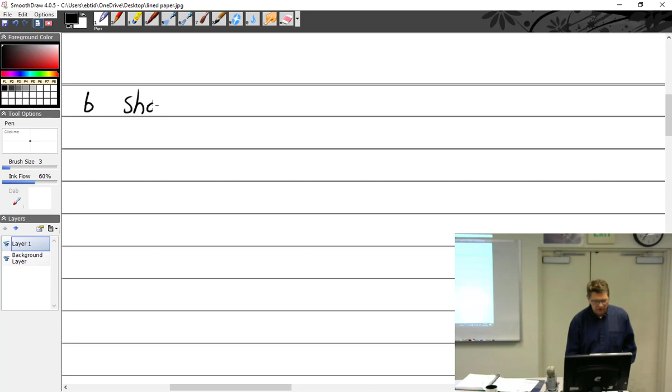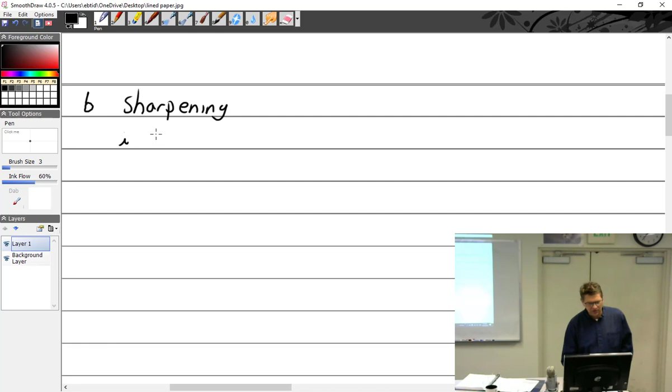So where we left off was B, sharpening. Put that in parentheses. Why should it be in parentheses? Sharpening. All right, and then we watched the videos. And according to the videos, we have things you can modify and control when sharpening.

What are the things that you control, or what you want to control? Give me some ideas. Angle. Yes, angle. Very good. There's only about 8 of them. Which angle? All of them.

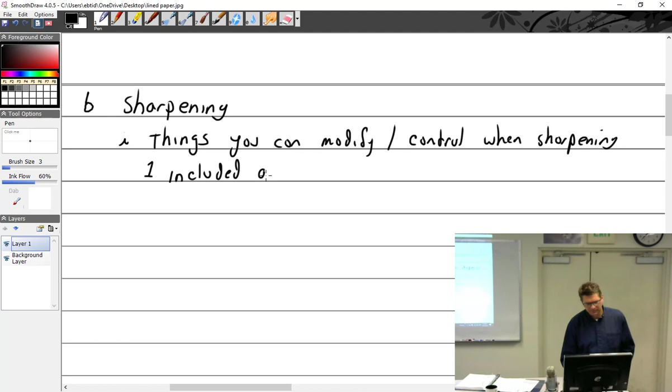Chisel edge angle. Lip angle. Drill point angle. Relief angle? How about the included angle? Oh, let's go with that. Field angle. What's the included angle?

What's the included angle? What is the included angle? It's an angle you include in the drill bit. It's this angle, which should be what for general purpose drill bits? 118, 118. You can control that by where the wheel is, how you address it to the wheel, right?

Is there a time when I'd want it to be something other than 118? Yes, when you're doing hard steel, you want it to be 146. Okay, good. You want it flattened out if you're doing hard steel. What if I'm doing some plastic? 40 degrees. How much? 90. Or pointing. Okay, so we can do that.

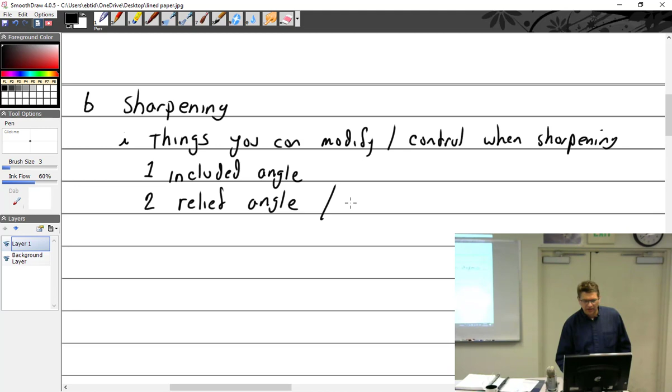And I'm going to have just one other one. What is the other angle that is probably even more critical? Very good, relief. Relief angle, also called lip clearance. So either which way, I've heard it both ways.

Drill bit speed and pressure.

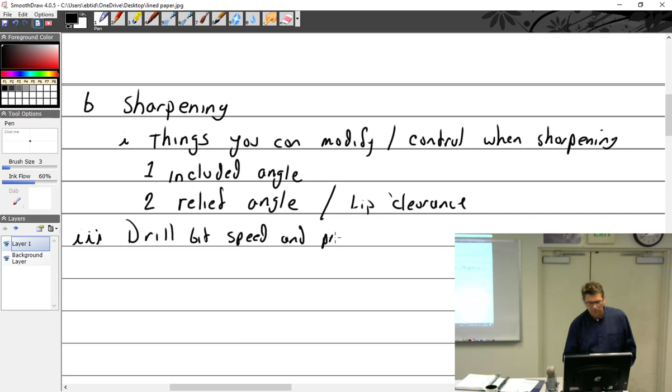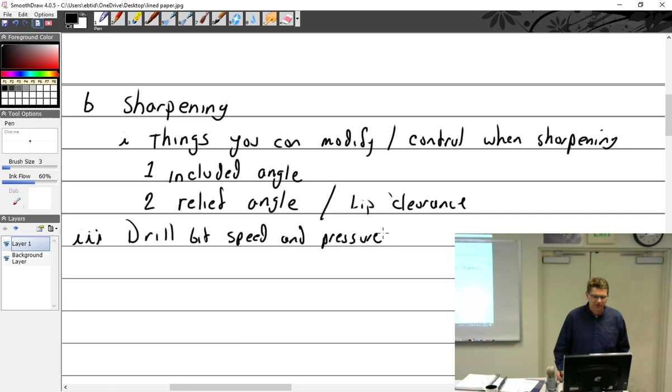All right, so we all agreed that it probably is cheaper under most circumstances to simply buy a new drill bit. However, if you do learn to sharpen them, there's been many times I've had a drill bit that just gets a little bit dull or a little bit of damage, and it's actually quite simple and fast if you know how to sharpen it, just walk up and give it a couple little swipes and you're good to go. It's not always economical to run to the store to grab a new drill bit, so it can save you some money. But it only makes sense if you have one like that size right there.

Yes, because those are probably $100 apiece, expensive. But if you have number 40s, you should already have a whole handful of them. So while that can be something we could argue about, one thing you can't argue about is drill bit speed and pressure is something you need to know.

All right, so for soft metals, or soft materials, we'll go soft metals slash materials. So what's a soft metal? That's kind of a little bit harder. Copper, brass.

You guys are drilling aluminum. What kind of drill bits do you have? Something flew in front of me. I saw it. Okay, good. I'm glad somebody else saw it. All right, general purpose for your aluminum.

All right, so soft, we're going brass, something like that, bronze. For soft, let me see, where are we at? The included angle should be, let's say about, because it can vary, about how much? Okay, 90 degrees. That's 45 each side.

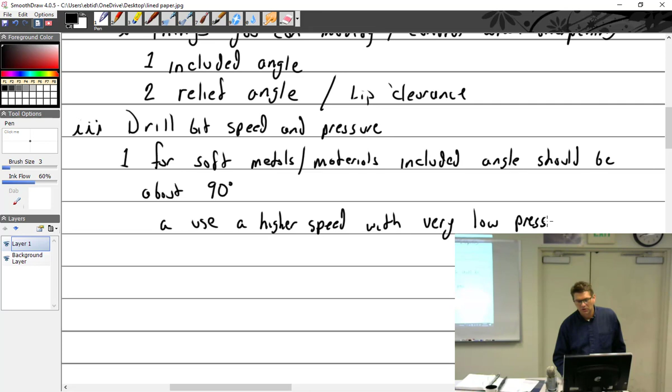Use a higher speed with, want to think high or low pressure? Low pressure. I'm gonna add that, very low pressure. If you're drilling plexiglass, which is something you do a lot as a mechanic, you put almost no pressure on it, very, very little pressure, and you back up your work.

You should always, no matter what it is, be backing it up, which means using a piece of sacrificial wood. Don't just hold it like that behind whatever you're drilling, because you'll eventually go through and get your finger or your hand. I wouldn't know that from experience.

So for example, we'll say an 1/8 inch drill. We're talking about, for plastic, about 6,000 RPM, just as a guide.

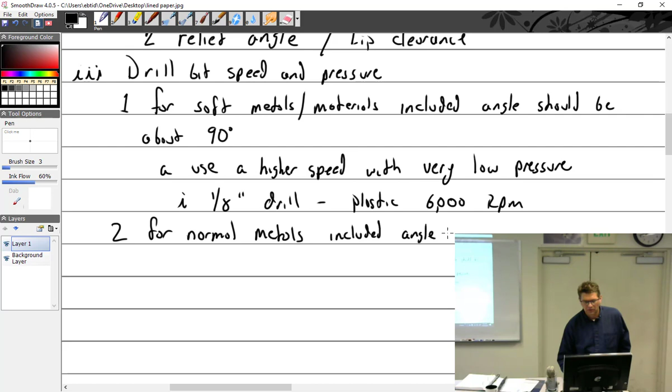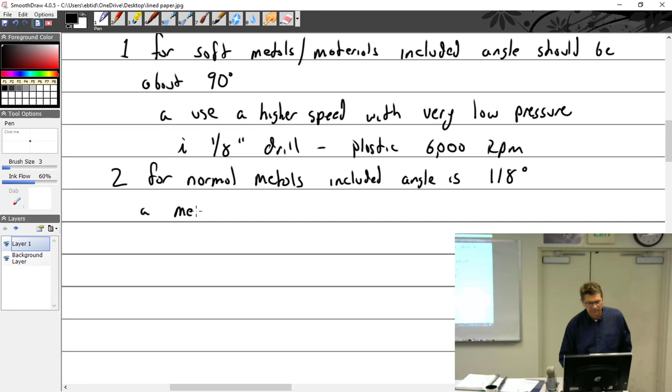For normal metals, meaning not high strength, the angle is what? 180. Okay, 118 degrees. So we have light pressure. What do you think here? Medium pressure. There we go, medium. Medium pressure and medium speed.

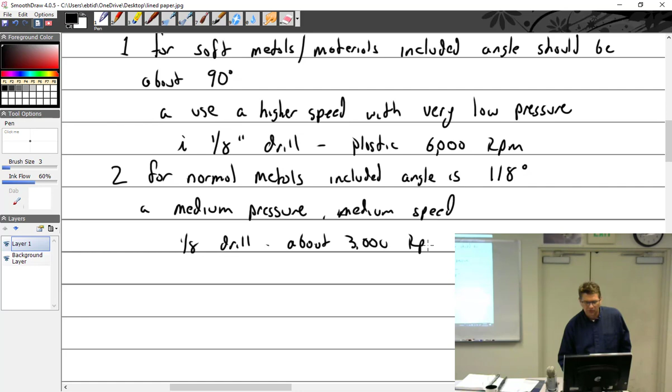Let's see, so for an 1/8 inch drill, I'm talking about 3,000 RPM. And then for high alloy steels, say high alloy, we're talking high carbon steel. I should say high carbon steel, not just alloy, but be more specific, because there's different alloying agents. But so for high alloy, or say carbon, or chromoly or carbon steel, the included angle is 140 degrees. Lower speed and high pressure. So about 1,500. All right, so those are the about things.

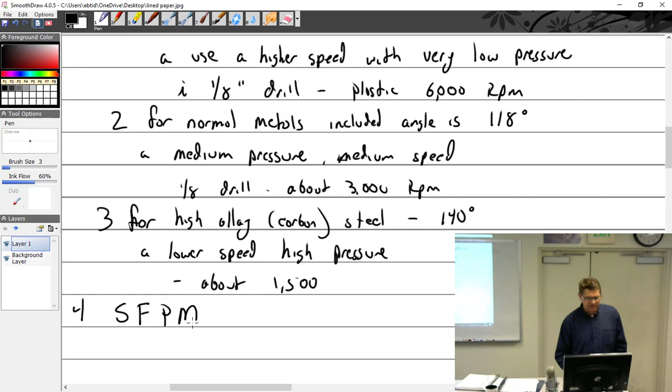About. But if you actually start reading some manuals as far as speed goes, they're going to give you a speed in SFPM rather than just a speed. So SFPM, what does that stand for?

San Francisco, I don't know. Super fast. Super fast what? Parts? Super fast parts manufactured. There you go. Sir something. With a permanent mess up.

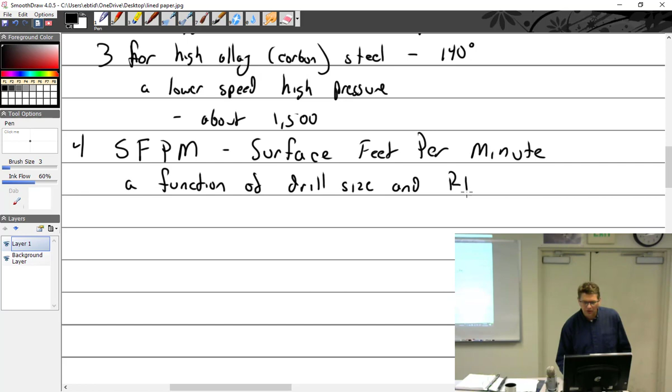Surface feet per minute. And the reason why a speed might be given to you as surface feet per minute is because it is a function of both RPM and drill bit size. So this is a function of drill size and RPM. RPM stands for what? Revolutions per minute. So if we have RPM, oh, sorry, this is the formula. RPM equals surface feet per minute times diameter times pi

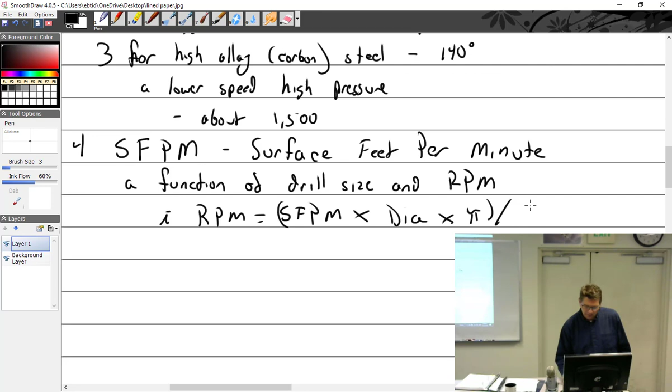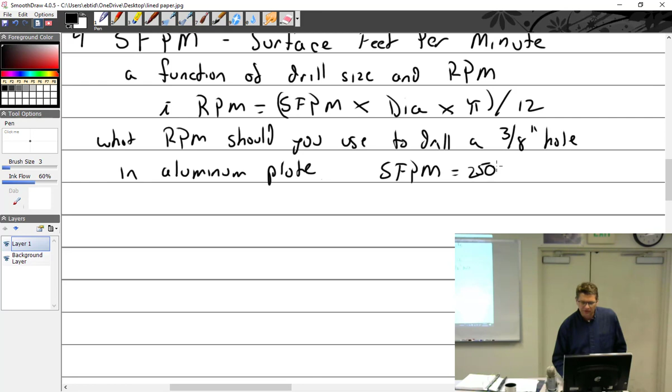divided by 12. So for an example, what RPM should you use to drill a 3/8 inch hole in aluminum plate? All right, and it gives you an SFPM of 250. So the question is, what is my RPM? Because that's what I can set on the machine, how fast I want to go. Now, it's going to be up to us for feed rate, how much do we push. So aluminum, are we going to push really hard, medium, or light? Okay, medium, so that we just know.

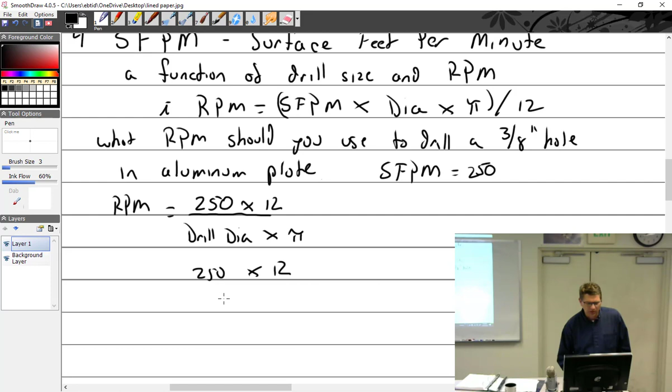So let's see, RPM equals surface feet per minute, so that'd be 250. Why does my formula suddenly look different? So I have it this way, times 12 divided by drill diameter times pi. There we go. So that'll be 250 times 12 divided by drill diameter, which is 3/8, times pi. And I'm going to end up with 3,000 divided by 1.178. So my RPM is going to equal 2546. Okay, I've got it written this way, but it transposes around to this.

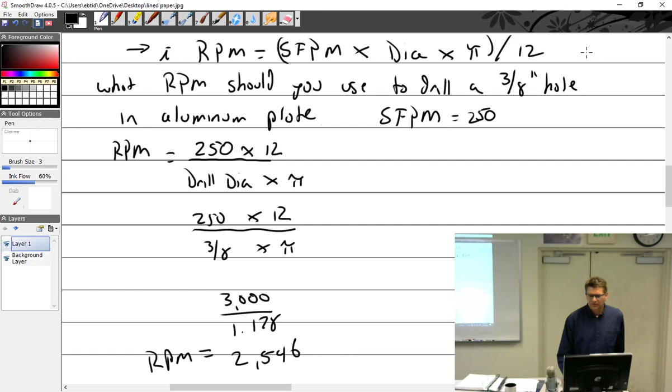Oh, it's the whole thing divided by 12. Yeah, well, it's the whole thing divided by 12. Sorry, yes, absolutely. They just copied wrong. I got to be honest with you, my notes have this up here. That comes out with like 23. I think there was a mistake there in that one. But anyway, this works out. I'm gonna fix that one. Is that gonna be on the test? Well, if it is, just use this one. And if it was, I'm gonna give you the formula. The right one or the wrong one? I'll give you one of them, and the answer will be based on whatever I give you, right? Somebody just did the top one. It comes out way wrong, right? Yeah. So don't worry about it. We'll just scratch that one. We'll just edit that part out of the video. You don't edit your video.

So here we go. Here is your formula. Just change it to this. RPM equals SFPM times 12 divided by drill diameter times pi. All right? So we'll make this the formula. And so we do that, we came up with 2,546. How does that compare with the about that I gave you a little bit ago for aluminum? Pretty close. There you go. Probably where I got that.

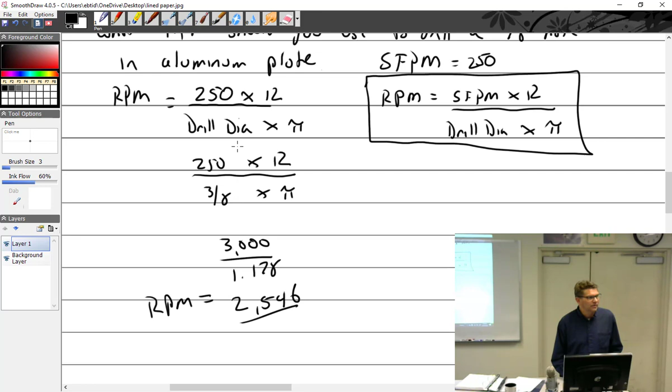Is that used to figure out the amount of material you're moving per second? What's that? The circumference, the bottom part of that equation. Is that what you're using to figure out the amount of material you're moving per second? Just looking at it, that's my assumption. Yeah, and that's why it's a function of the drill bit diameter. And we could work a couple different drill bits, but I'm not going to make you do that. Don't have a lot of time. So where am I going now? Oops, stop doing that.

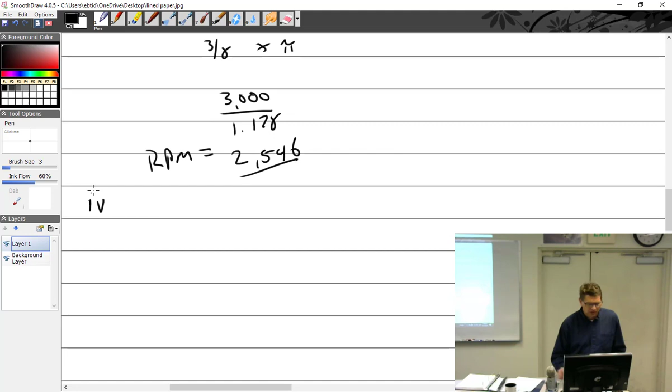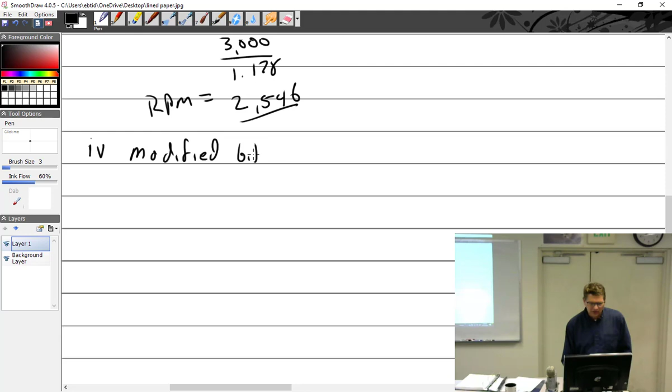There are also different styles of drill bits. One of the ones I want you to know about is the modified drill bits. Modified bits for plastic and other soft materials. And one of the modifications is what's called a zero rake angle.

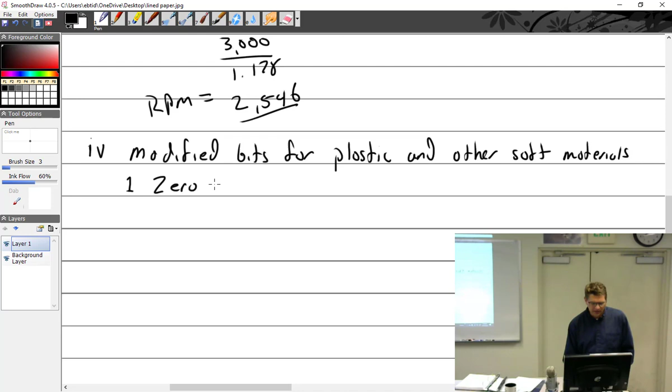Zero rake angle is a little bit difficult to explain, but I do have in lab, I made one. All you do is you take this lip, which I don't know if you can see real well, and just grind it. So right now, I've got an angle with the cutting lip, and the flute is coming back like that, right? And so right where my fingers meet, that's my cutting lip. And my hand's got to be down here, so this angle is the what? Relief angle. Okay, then the flute comes right like that. And that's going to really cut in.

And if you have plastic, that's going to cut in and actually spiral right through the plastic and then break out the backside. So a zero rake angle actually happens when you grind it square off. So it's 90 degrees to that. They call it zero rake angle. I don't know why. But it becomes this squared off piece that doesn't have a lip that grabs and cuts. It's got a square piece.

So what's that squared off piece going to do? Stop this way. Shear. Well, it scrapes. So it's just a scraper now. There's no chips, so it just scrapes it away. So what you're going to see is as you do it, it's going to scrape it to a point, and then it'll actually curl up out into the flutes. So zero rake angle. Let's see, I could try and describe it.

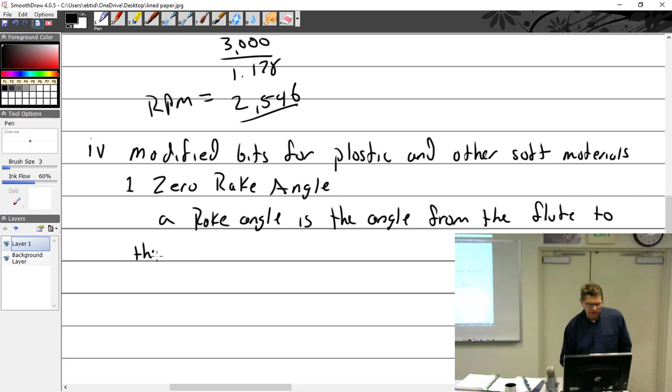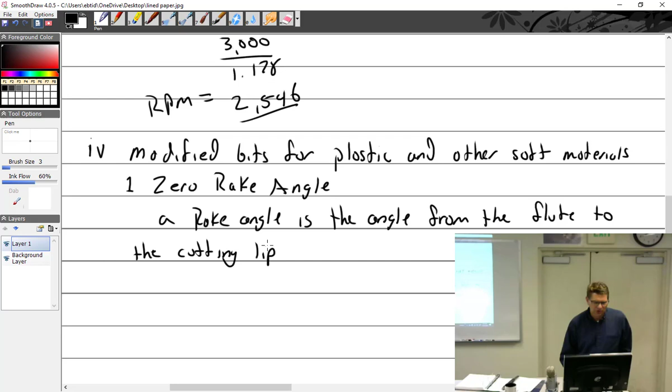Rake angle is the angle made from the flute to the cutting lip. Rake angle is the angle from the flute to the cutting lip. So what would the rake angle be on like a general purpose? Like this one, I don't actually know what that angle is right there. There's nothing you can do to change it. It's just there. So it's not one of those things I worry about. I can't do anything about it. The engineer chooses the angle, right?

But I can change it to a zero rake angle by just grinding that away really quick. And that's what I did whenever I had to work on plexiglass of any sort. I just grab a drill bit, make a zero rake angle, and just label it plexiglass from that point on. So I had a little tray that had just plexiglass bits that I had made. I usually grab one of my buddies. Hey, can I borrow your drill bit? I don't want to use my own.

Zero rake angle removes the sharp cutting lip and makes a bit that scrapes the material rather than cutting.

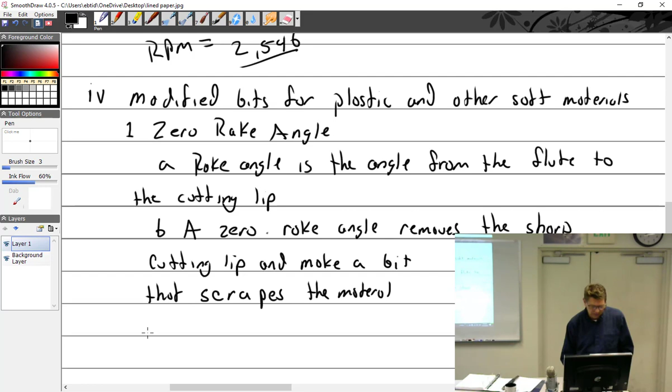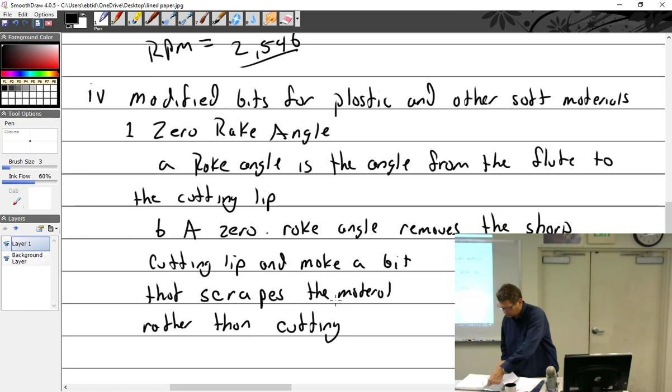All right, how about a couple of rules for drilling? Well, you guys have drilled a lot of stuff already. One, always, it's like working with the computer, always back up your work. What do I mean by that? Something behind it. Save as. External hard drive. So what do I mean by always back up your work? Put something behind it. Yep. What are things that should not be used to back up work?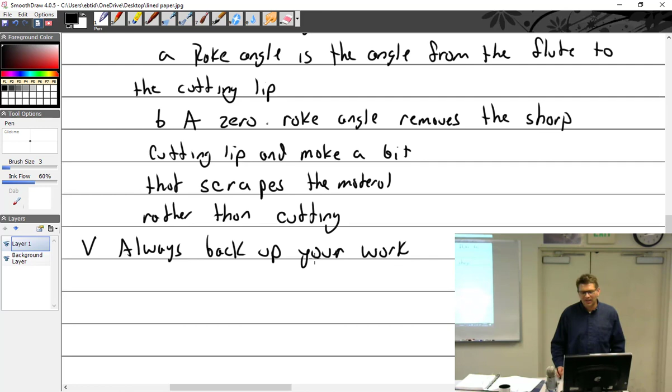Your hand. Somebody's face, your neighbor's laptop, your laptop. Your wallet. How about the desk, the vice, the table? I know it's made out of wood. It does work for a while. Something sacrificial. You can back it up. That's my stuff. Yeah, that's rude. This is especially important with softer materials.

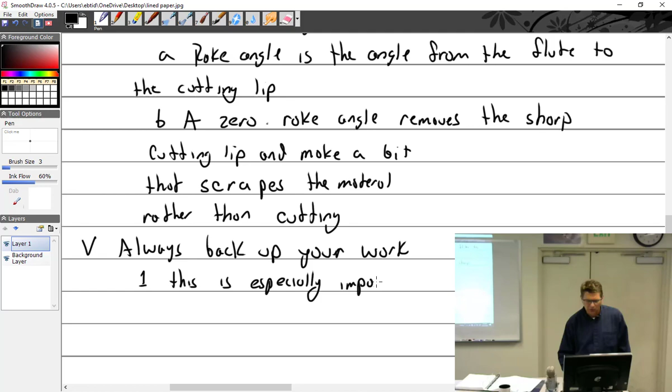Windshields are very expensive. They don't come pre-drilled, and they often don't come the right size.

Got it. You're right at it, too. You're really losing it, Kevin. Kevin, you know they have medication for that, right? Yeah, Kevin. Why don't you ream holes?

Oh, let's talk about that one. Your question is, why don't they ream holes? We do ream holes. No, instead of drilling. Okay, so there's a lot of Q&A questions about reaming holes. So, for example, when you're drilling all of your projects, you're either using a 21, a 30, or 40 drill bit, right? And the engineers have figured out that's close enough, good enough, right?

But when I'm working on engines, especially working on cylinders, guide bores, guide bosses, where the dimension was absolutely critical. Like, for example, this is the most critical one, the guide on the Lycoming is 0.4995. Not 0.5, 0.4995. So we're getting out there quite a ways, right? Five ten-thousandths of an inch. That's 4 digits out.

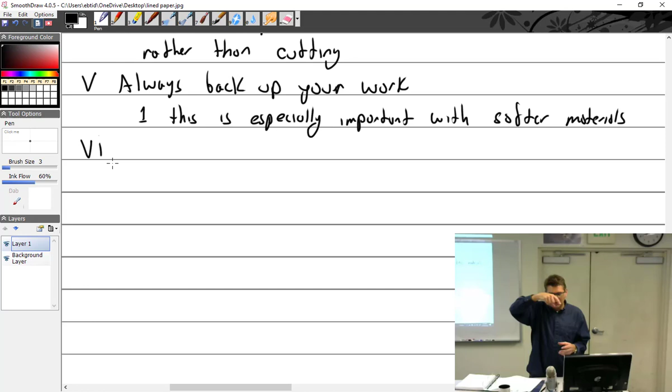So the pilot would be the exact same size as the hole you just drilled, with the reamer flutes slightly bigger than that to go to the size you want. And you would just rotate through and go down. Now, the thing with the reamer is you never back up because it ruins the cutting lips. So you just ream it through, and then you get a precision hole. So that's the reaming. So if you do have a precision hole, you're going to ream.

And I think there are several Q&A questions that have that. Maybe that was the IA test. I don't remember. There's some questions I remember somewhere about reaming to size, or maybe the questions I wrote. So yes, you do use a reamer. The Hi-Lok. Yeah, I think Hi-Loks use a reamer, right? Yeah, it's because it's a precision size.

Were you talking about the cylinder itself or no? Yeah, cylinder and the guide that goes in. You'll get that next class. But just engine parts. Use like a line bore? Actually, the stuff I used was a line bore machine, but I didn't want to get into that.

There's a question on it about reamers. It's like, so if you want to ream to this, what size? Yeah, which procedure is correct when using a reamer to finish a drilled hole to the correct size? So if you're using a reamer, you're always going to go undersize and ream to the final size.

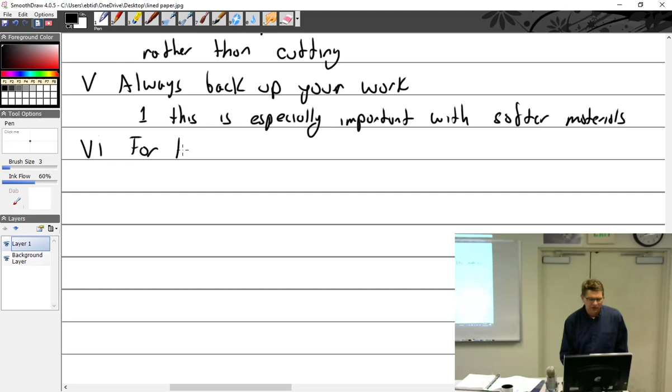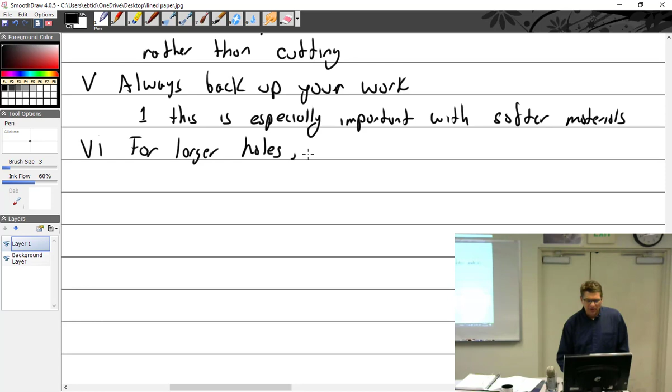Okay, for larger holes, and even to some extent for precision drilling, but that's kind of the way I do things. For larger holes, use a pilot hole. All right, so what a pilot hole is, let's say I've got to drill something out this size. Do I just start with this? No, for a lot of reasons. One, it's going to take a lot of pressure. A lot of drill presses don't have the horsepower to actually drill a hole that big to start with.

So ideally, and as you picked up in the video, you would want a pilot hole that's the size of the chisel point. So it takes care of that and the rest of it. All right. But now here's the way I learned to drill.

I started drilling material when I wasn't always a fat guy. Josh was a big guy compared to me when I was a fit guy. But when I started metalwork, I weighed about 150. And I was still this tall.

And so we were drilling holes in iron, and I remember my dad telling me, "All right, be careful when that drill bit catches; it'll break your arm off." I was terrified. We were drilling holes like that big, and so the way I had to do it is I would start with a small drill bit, maybe an 1/8 inch, and punch an 1/8 inch hole. Then I would go to like a 1/4 inch, and then 3/8, and then I would size it up. In the video, the guy complained that it tears up the corner of the drill bit. Okay, true. Rather than tear your arm.

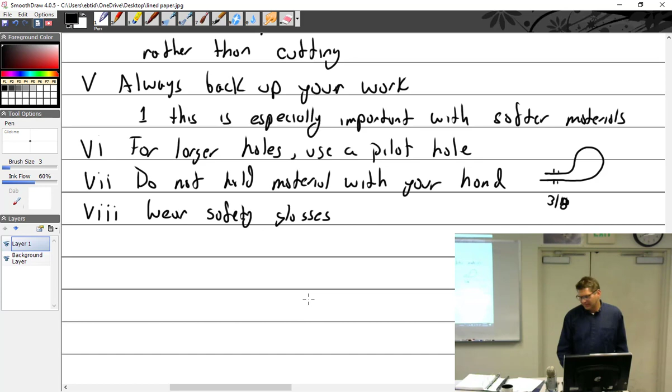I think that's all I need to say about drill bits, which is actually quite a bit. I mean, that's a day and a half worth of talking about drill bits. Yeah, who would have known? Who would have thunk it, right? Dang bits.

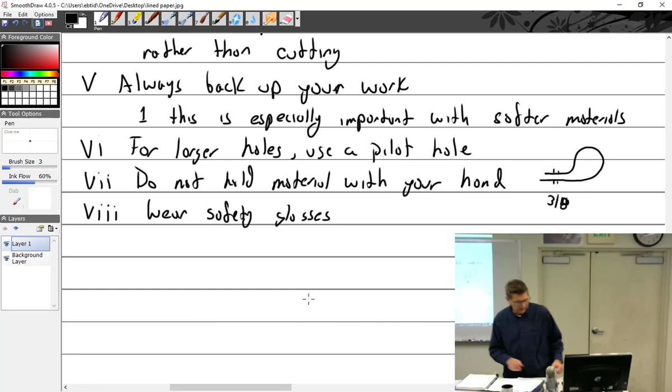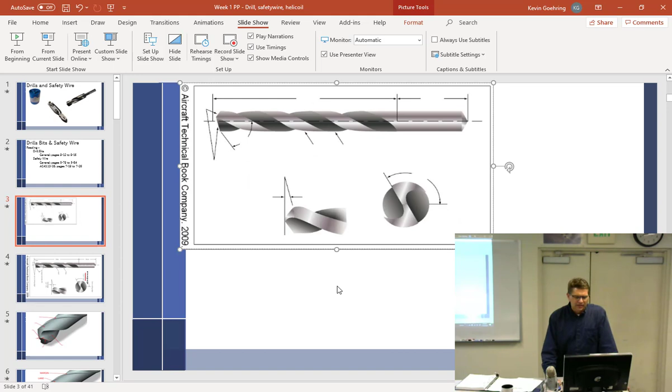All right, let me just... Oops. Okay, so given this, which actually you can't... Wow, that just got all messed up. Still want you to print one out. It's on Canvas. It's in your text. Oh, this isn't gonna work because it's covered up on the bottom of the screen right there. So I gotta go like that. So is this on Canvas? It's in your textbook. I know you have it. It's that thing that's still wrapped in clear plastic cellophane so it won't get dirty.

You have to pop it open. It's not big enough. Okay, boom. I had this open today, Kevin. Yeah, did you? Oh yeah. Swear to God. You don't have to say.

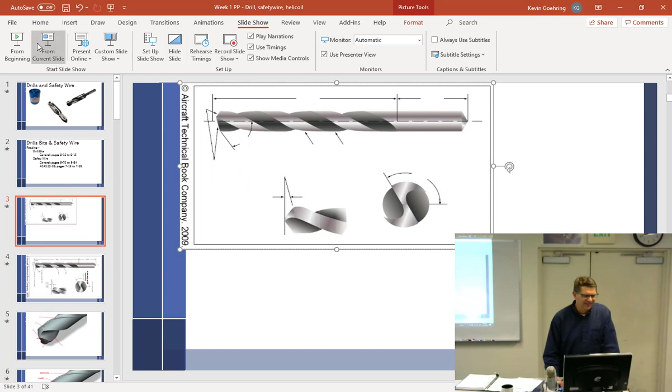Okay. What is this right here? What does this represent? That is shank. Shank. Okay. What is this part here? Body. What is this pointing at? Flute? Land.

Inside. I know how Steve feels. Oh, there it is. Hey! There we go. That's a land. Land ho. Land. Okay. What is this pointing at? What are we looking at here? Margin? Probably the margin. I don't think they're pointing to the center line, so I'm going to say it's margin, probably. Okay, so what is this angle right here?

The cutting. That line doesn't exactly line up with this very well, does it? Included. Isn't that the cutting angle? It does tend to line. Is it lining up with the flute? Yeah, it sort of lines up with the flute. They should have put it here. Yeah. All right, so if this line matches that line, we'll call it the flute. What is this one here? Heel angle?

This is a chisel edge. Chisel edge? Oh, this is a stupid one here because that's the chisel edge. Yeah, the lip angle. The heel. Wait. Kevin, one of the ones I was looking at, it says heel, a neck. Do you count that at all? The neck? No, I don't. And the body? All right, well, that actually is a little confusing, so let's go to this one.

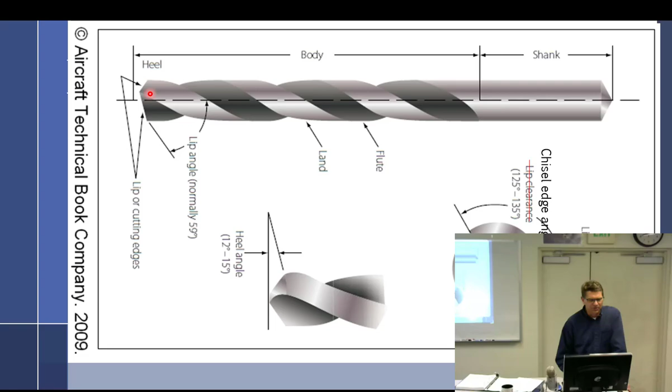What do we got here? Okay, that doesn't line up with that, but I'm going to call it the lip angle. Well, they called it the lip, cutting edge. That's why. They just made that line a little pathetically off here. That's pointing to the lip or cutting edges. Oh, I see. It's not an angle. I don't even understand what they're doing. Okay, so go back here.

So this angle right here is the lip angle, or also called the cutting edges. Included. The heel. Oh, wait a minute. I'm sorry. Lip angle, yes, or also called the cutting edge. No, lip angle, or I've been calling it something else. It's 59 degrees times 2, 118. Included angle. The included angle. That's still off. So this is the what? Lip angle? Included angle.

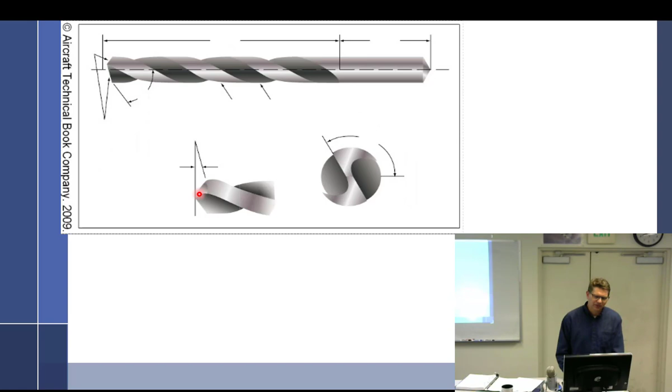All right. This one is the land. Okay. This is flute. Body. All right. What are they trying to represent here? I don't like this one, but heel angle? Relief angle. Yeah. Heel angle or relief angle is what I call it. Chisel edge angle. That's what that is. That's not the lip clearance at all. That's a chisel angle. All right. So lip angle, normally 59, also called the included angle. So you think you can handle that?

Where's the chisel edge angle actually measured from? It's just from the line that this middle makes versus this here. So that and that. But that line is not like the other line. That's why I don't. Yeah, neither is this line. All right.

As the drill bit gets shorter, the chisel point does what? Gets wider. Why does it get wider?

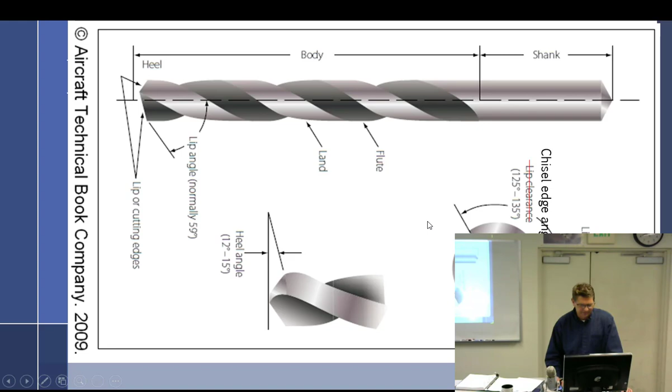Oops. You can't see that if you're actually watching the video. Well, sucks to be them, doesn't it? I know. Sucks to be Christian. Sorry, Christian. Where is Christian? I don't know. There you go. Now you can see it. Except that didn't. Christian, you screwed everything up for me. All right. What an asshole.

Whatever. Okay. Drill bit gets shorter, the chisel point does what? Wider. Why? Because the web gets thicker. All right. If I am drilling, as the material I'm drilling gets harder, what am I going to want to do with this included angle? Make it flatter. Are we reviewing for the test right now? 120 degrees. Reviewing material. Sorry. But I was missing something here.

Larger number. It gets flatter, but the angle gets higher. Yeah. That's why I'm very careful every time I talk about it. I say it gets more pointy or flatter, and then I give you a number. So softer material, it's going to get more pointy, or 90 degrees. Higher strength stuff, it's going to get flatter, or closer to 180. So, all right.

So that degrees is wrong, right? Lip clearance? No, it's actually the chisel angle right here. Oh, okay. All right, we have two questions. You said the other day there's the one at 90 degrees and there's an even pointier one at 40 degrees. No, I didn't say that. You confuse pointy with 40. 90, half of 90 is 45, so 45 on each side.

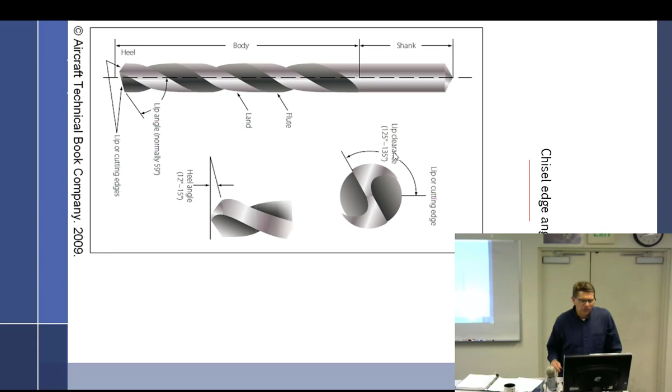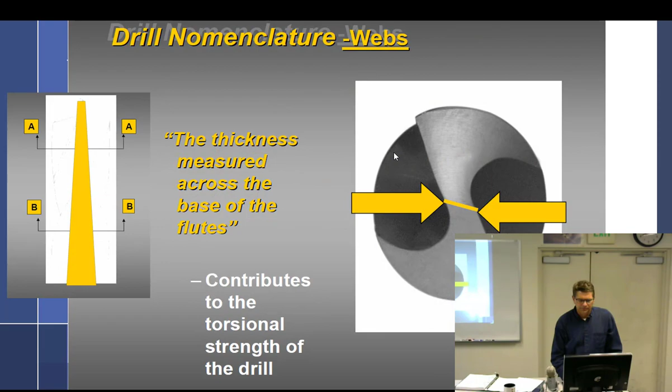My relief angle - what happens if the relief angle gets too low? More heat. Looking for a nice relief angle picture here. Don't know if I have one. What happens if the relief angle is more flat? There we go, yeah, it's more flat. It'll get hot, burn its way through. Okay, what if it's too much? Oh, very little - okay, edge chips.

Yes. What's the proper way to measure a drill bit? What's the proper way to figure out what size this is? Was it stamping? From margin to margin. What's that, Brett, the stamping? Look at the stamping on the side - it says 1 1/8. Nice.

Okay, if I can't see that, where do I measure? Well, normally the shank is the exact same size, so I measure down at the shank - the biggest part of the shank, because that one's the taper. Yes, well, because it's a taper shank, I would measure nowhere near the shank, nor would I measure this little step. It's got to be right here.

So, given a normal drill bit, would I measure the distance between the lands? Yeah, land - but margin from margin. I said land. Land? Yes or no? Yeah, I'd say so. The land is the relieved out part. Oh no, the margin - margin sticks out. Okay, margin to margin? Well, that's going to be kind of hard on something that's round like that. I don't know, how about measure the shank? I'm going to go measure the shank. I would say that's the proper way to do it.